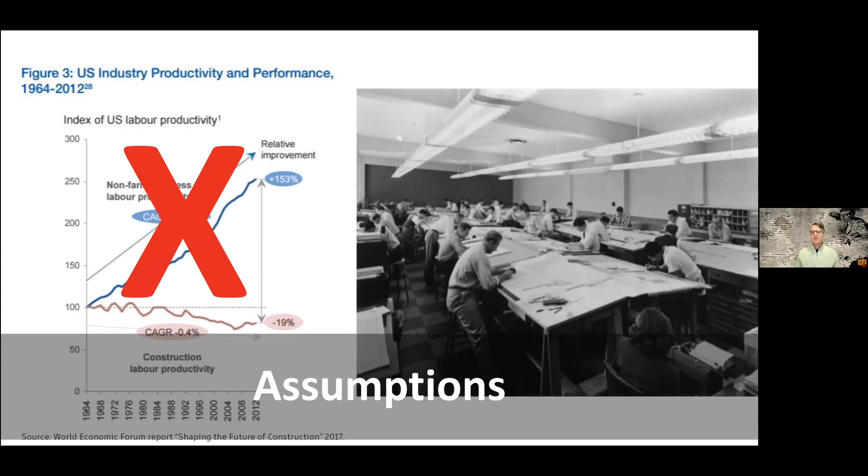I'm asking you to just quit worrying about that. Just don't worry about what happened in 1964. Worry about what happens tomorrow, 2020, and get off our collective you-know-what and go start fighting that fight. This assumption that we're an antiquated industry is ridiculous, and we don't need to believe that. We need to believe in what the future holds, and I think you'll hear a lot of that from the rest of the speakers today as well.

We're also fighting time. As of 2020, our industry collectively, at least in the US, is around 44, 45 years old. And if you look at our colleagues in the EPC world, engineering, procurement, and construction, that average age is more like 55 years old. I want you to think about that for a second.

In the AEC world and the EPC world, in 10 to 20 years, 1 to 2 decades, we lose most of the knowledge that we have today and how we design and build. To be really honest with you, that's both an opportunity and it should scare the heck out of you.

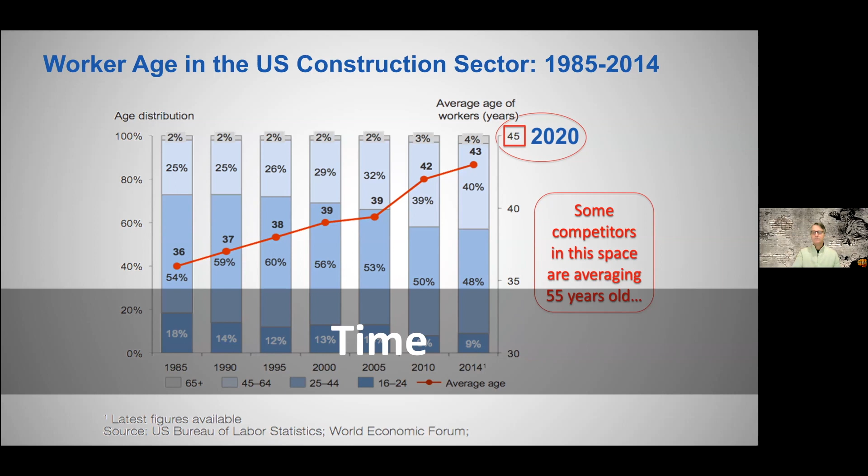Plus, we're fighting culture on a daily basis. At the very least, people are telling us to stay put, do not change. At the very worst, they're telling us to slow the hell down. And I'm begging you to fight through that. Put up your fists, put up your dukes, walk right through that. Don't listen to that. We need to speed up. We need to go faster.

And this is not about throwing more warm bodies at a project. It's not about trying to kill ourselves. I'm still talking about integrating, innovating, adoption of all these things that are in front of us, all these tools, all these procedures, all these processes. Adopt them faster, do better work, and do it quickly.

When I say new and different in my definition of innovation, what do I really mean? Is there anything really new or different? I'll talk about that in a minute, but every day is the future. You hear a ton on conferences and LinkedIn and a lot of talking heads, not unlike myself, who say look to the future, I'm a futurist, we're going to be on different worlds in 100 years and it's going to be great. I'm asking you to look just to tomorrow, just the next day, just a week ahead, a month ahead, a year ahead, because every day is the future, and I want you to take advantage of that. But having said that, let's for a second just look backwards.

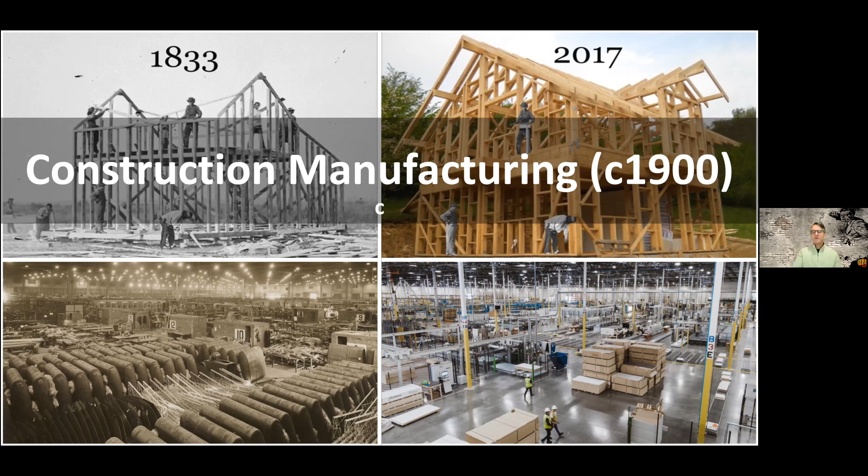Modular construction - I'm a huge fan of modular construction. I've created and spun out a couple of smaller modular construction startups. I am the poster child for let's go modular. What's crazy is we've had this since 1940, 1950. Amy and many others on this know this perfectly well. We're super excited about it in 2020, this is the latest and greatest innovation, but it's really not. We've had it for 50 years. Why in the hell have we not been doing this for the last 50 years and doing it excellently?

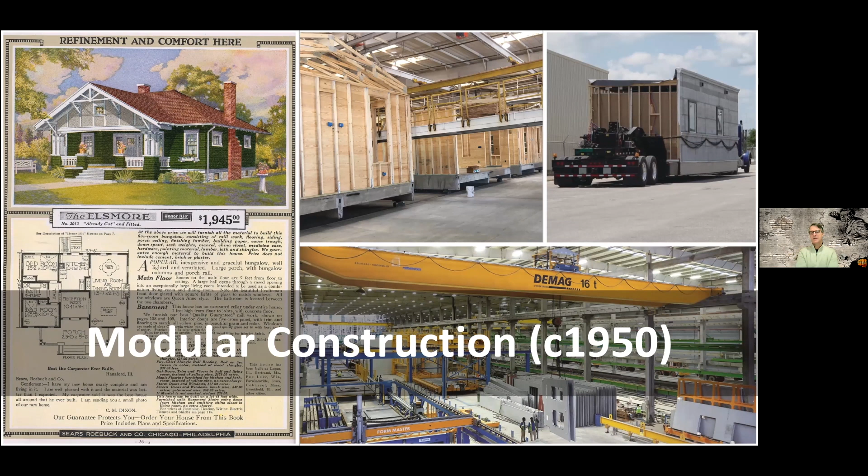In 2020, I'm telling you to fight through the assumptions that we've been making for many, many years and start adopting the innovations and the inventions that we have at hand and we've had for many years.

And I'm begging you to break through those barriers and tell everybody: look, we're not inventing anything right now, we're adopting. We're going forward, we're taking all of this great history that we've had and we're actually making it viable.

Industrial robots, in the manufacturing sense, aren't just for putting together a Volkswagen or a BMW. It's for putting together a building today, tomorrow, the next day. Since 1950, for 50 years we've had this.

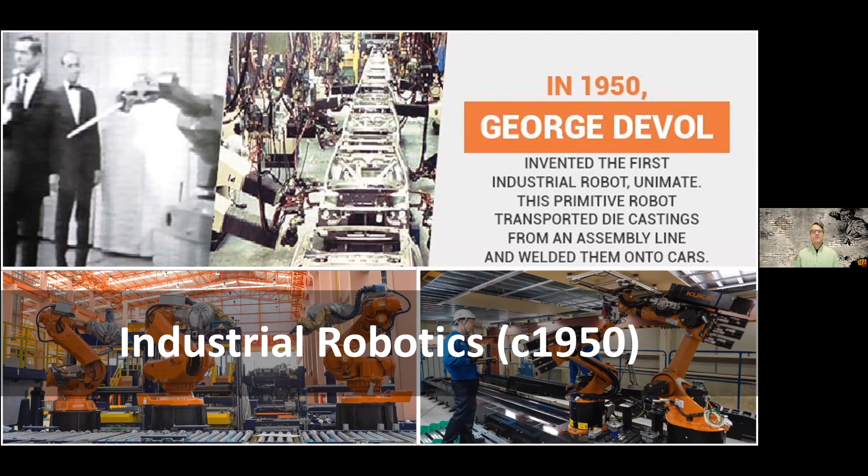And for some reason, we want to pretend that we're unlike everybody else and we can't use those innovative tools. By God, we can and we should, and we know how to do these things, and we should put those in our arsenal and innovate like crazy starting tomorrow. Even construction robotics - this is a huge field that is going to make a huge difference in the way we design, let alone the way we construct.

But this photo with Kennedy on the left-hand side is not a photoshopped photo. He's strolling past viable construction robots in the 60s, and here we are today, getting super excited about something that has been around for 40, 50 years. But for some reason, we've been fearful of pulling it onto our industry platform, pulling it onto our job site, pulling it into our designs.

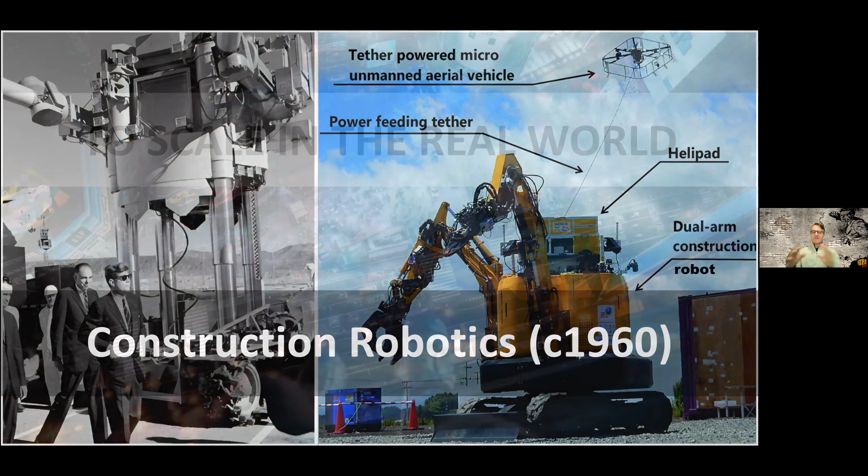And I'm telling you, there's nothing to fear here. This is all good. This is all innovation. This is all opportunity. Having said all of that, how do we scale all of this into our world now? It's not that we haven't had it. We've had it, and we've got it today. Now, how do we scale it into the world that we go through?

Well, sort of like I've been talking about, this innovation continuum that we've been on since the dawn of time - everything that we have today that we think is required, the cell phones, the cars, the PPE, the processes, the procedures, all of those things, whether it was a document or an artifact, was impossible at some point. Some crazy person jumped out there and did something, some kind of prototype, some kind of silly thing, and it looked impractical, and we laughed at them and we pointed at them, frankly.

But then a spark of genius showed up in each of us, and we thought, well, maybe it's possible. And then we said, wait, it's not only possible, I want it. We should have that. That's genius, right? And then it became scaled and required.

And I'm asking you to jump into that. Everything should be expected. We should expect everything, to be honest with you. We should go after everything. We should have everything because we can. We're smart enough. We can do this thing. We can innovate the heck out of our industry and expect everything that you want can happen, can come to fruition, and it can be required.

Scaling this innovation is really important, and I'll give you the one secret word to scale across every industry, let alone ours: experiment. And this is the one thing that I think our industry is really, really loath to adopt. And it's the one thing that has held us back for 50 to 100 years. And that's experiment. We're so worried that we're going to spend money on things that don't work. And we're so worried about failing fast or frankly failing at all.

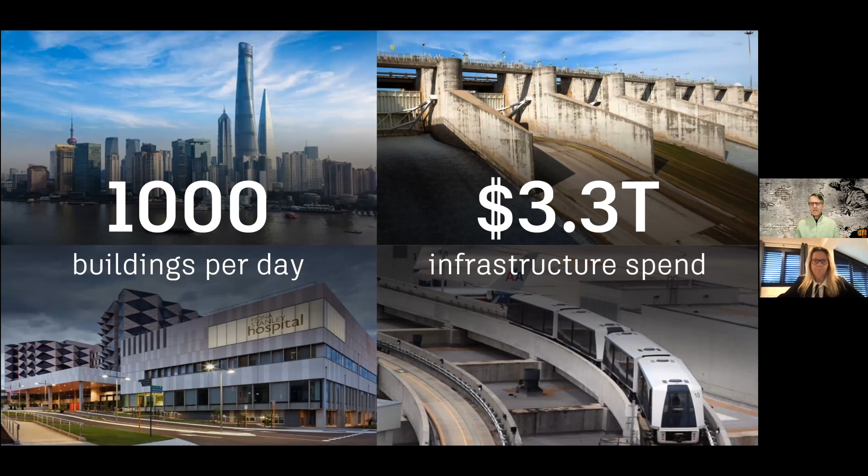We collectively are building buildings at 1,000 per day, and that number will only go up. The spend on what we do is only going to go up. Trillions and trillions of dollars in infrastructure. We're 6% of the global GDP demand. And then you've got regional demands and requirements, and Ireland is in this as well, just as the United States is, and EMEA and APAC.

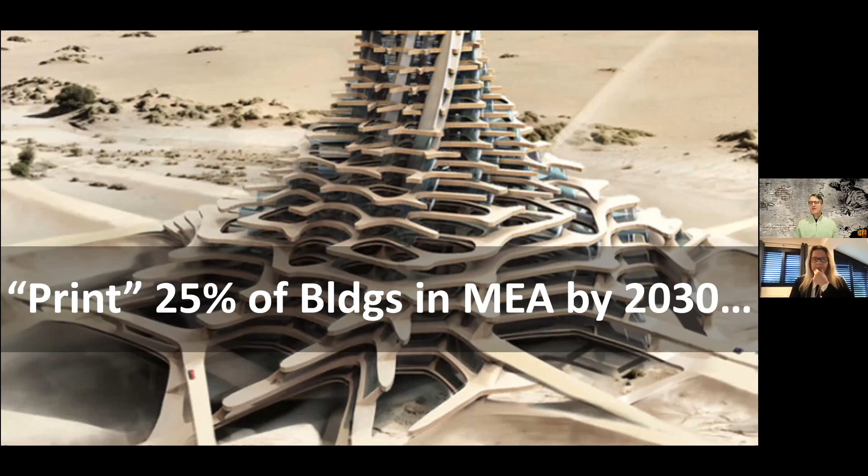But you look at MEA, and they're talking about printing 25% of the buildings across their region by 2030, and that's nothing. Our own U.S. government, whether you love them or hate them, has basically put a flag not in the sand on planet Earth, but in the sand on Mars. We're talking about inhabiting Mars by 2030.

And even if you think that's silly, even if you don't believe that's going to happen, putting a flag that far out and failing gloriously is going to put us and our industry so far ahead of where we are today that it's going to have a huge significant impact. So my call to arms here is get in the ring and innovate everything, question everything. Look at what you're doing and try to make it not just a little bit better, but in a crazy, crazy, crazy amount better.

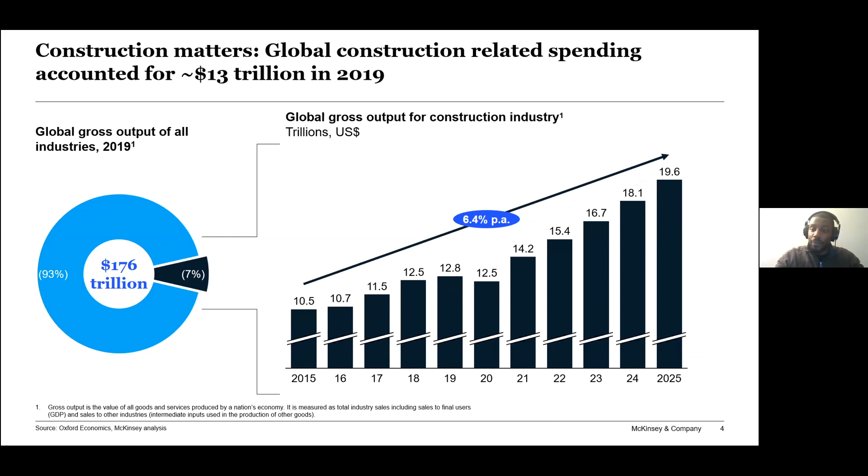I won't belabor this point because Chris talked about it pretty eloquently during his talk, but there are some significant outcomes and dynamics that drag us down as an industry. When we think about the construction industry overall, it's a really fragmented industry. We're talking globally here, everyone works on a project-based approach. There are generally misaligned contractual structures and incentives, and a lot of use of temporary contractors and staff.

I think this is a contributor to some of this risk aversion in the industry: a big general contractor is in many instances not necessarily executing, hands on hammers, a project, but they're managing the project and managing the risk around it. So you've gone from people investing in truly building the asset, outside of the technical and project management expertise, to people managing the risk around the building of the project. And when you're a risk manager, you're naturally much more conservative than if your entire business doesn't hinge upon your ability to manage out risk.

So where does that get us? Lagging productivity growth, we've talked about that previously. Slow innovation and digitization. Low profits - I know Chris quoted a number around 1.8% on average globally; we're looking at 4 or 5%, so that's not as bad as 1.8, but still nothing to write home about. And then low customer satisfaction overall - budgets and schedules are routinely overrun.

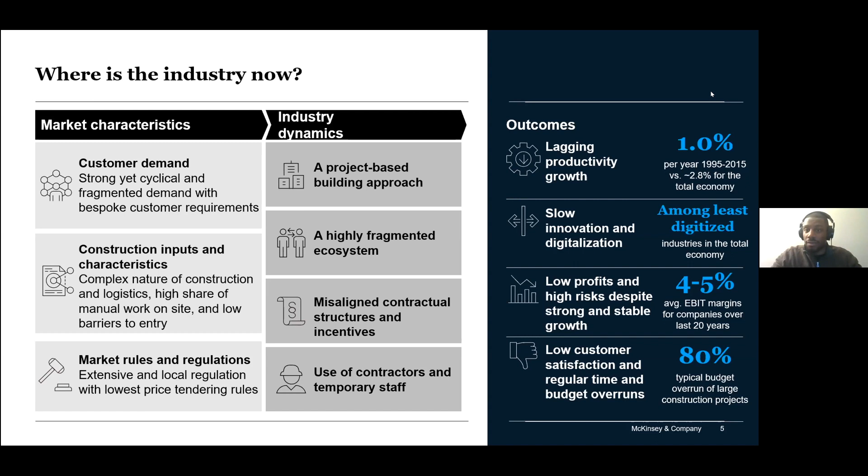So what does that mean in the context of COVID-19? We did a survey back in May to understand what the industry was doing related to the global pandemic. Nearly 70% of respondents believed that COVID-19 is going to accelerate investment in technologies and facilities. And that was mirrored by this thought that they were going to also invest in the control and value chain and industrial grade supply chains.

So what do we mean by industrial grade supply chains? Right now, if you're a general contractor working in construction, chances are you work on a project by project basis. You sign a deal with an owner, and 6 to 12 months later you're calling your suppliers for the materials for that project. You're either putting those materials in a laydown yard, or storing your consumables at an offsite warehouse. You've phased the really big stuff in so that it gets built and shipped to site on time. And then you build that project.

When we say industrial grade supply chains, we're talking more about Volkswagen, Ford, even Tesla, Microsoft, Dell, Intel - supply chains that span multiple projects, that span multiple geographies, and that leverage the heft and breadth of your organization across multiple projects to drive up your efficiencies and drive down your overall material and supply chain costs. This value chain control and integration with industrial grade supply chains is one of the main pushes that we see, and it's also accelerated due to the global pandemic we're currently in.

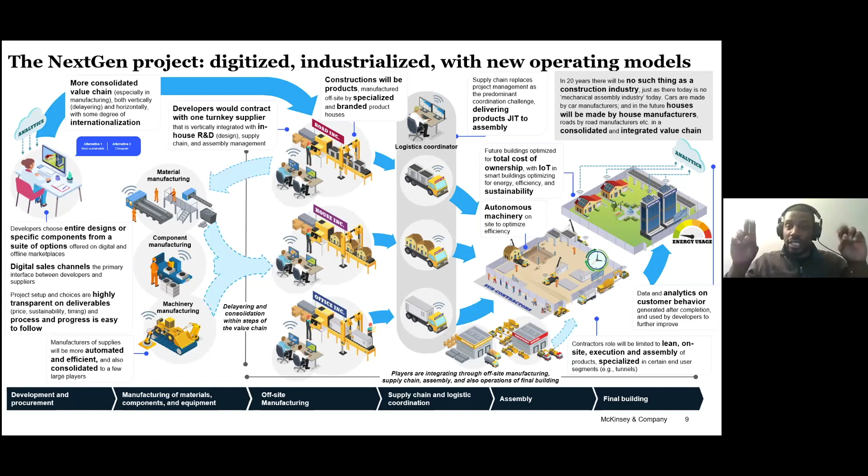Finally, when you look at contracting and execution, the contractors and folks on site are going to need to produce a project at a much higher level of productivity, with what you'd consider the buzzword lean construction—execution and assembly specialized and focused on site at a much higher degree than we are right now. So let's look at a couple of case studies about how this is actually happening right now.

We made the statement that developers are choosing entire designs or specific components from digital marketplaces. In a sense that's happening right now. I picked a random manufacturer on the platform, so there's no focus here specifically on CEMEX—there are lots of different building material suppliers here. But NBS Chorus and NBS Source effectively enable you, through BIM objects, to choose and specify the specific building material and supplier, in some cases way back in the design and specification phase of a project.

So you have architects literally saying, I want CEMEX dry silo mortar in the masonry that's going to go in this area of my project right now. There are also, through NBS Source—again just an example—ways to enable them to say, all right, I'm now going to go to that manufacturer or building material supplier and source the materials earlier. So you're seeing a couple of things.

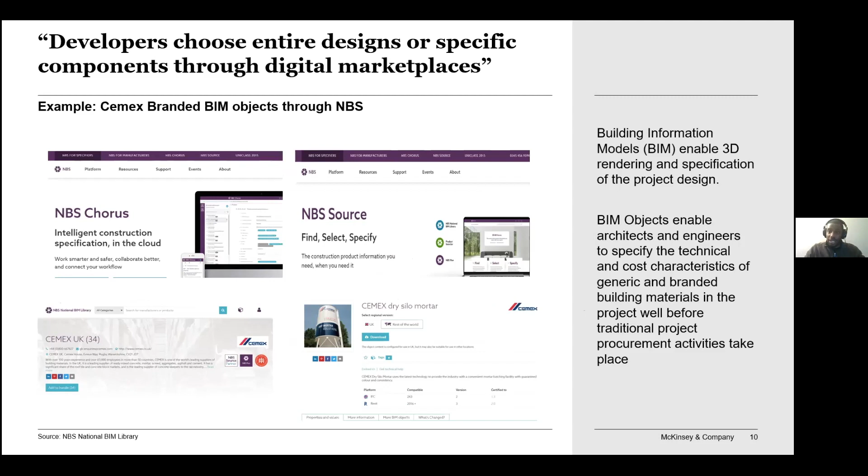You're seeing developers shift this procurement function earlier in the process by leveraging building information models and BIM objects. And you're also seeing the rise of these digital marketplaces, as opposed to needing to go through either a general contractor or even a distributor. You're able to specify these things and then access them digitally.

Developers will contract with one turnkey supplier. The market's global poster child for this is Katerra, but there are other players, most notably in the UK, Top Hat, also following this model, where they own the production of the building end to end, all the way from architecture, design, and engineering through execution. While these are newer models, they won't be the last to adopt it—now you're building a Katerra real estate or multifamily asset, or a Top Hat single family home: a branded project, as opposed to Joe's Construction building a bespoke house somewhere.

Supply chain replaces project management as the primary coordination challenge. This is an example from 2019 in England, where Mace Group built factories on top of two high-rises in Stratford, literally managing the supply chain to bring building materials onto the factories, subassembling all the components, and then fitting out each story. They completed 18 stories in 18 weeks without raising the cost of execution.

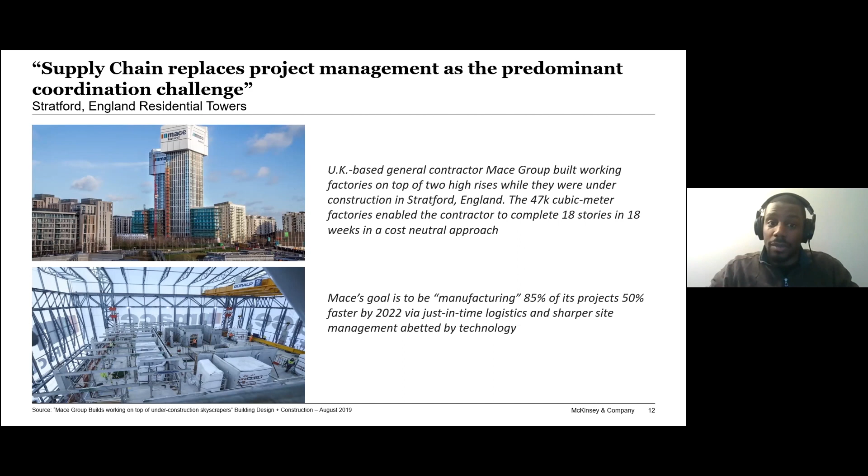Talking about moonshots, their goal is to be manufacturing—not constructing, but manufacturing—85% of their projects 50% faster within 2 years from now, via just-in-time logistics and sharper site management abetted by technology. So it's not simply about project management: are my subs on time, do I have materials in my laydown yard. It's about managing the logistics and supply chain as the fulcrum of your productivity and profitability, rather than just your ability to manage risk.

So those are the topics I have to cover right now. I see Claire with my warning, so I'll stop here. If there were any questions and I had time, I'll take them, if not we can move forward.

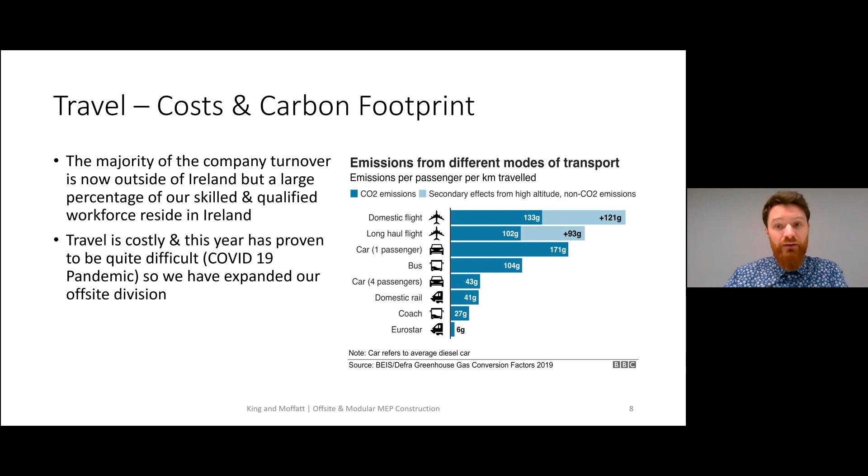Another reason we started looking at this is delivery issues. We find that doing some of the work offsite really eliminates issues we've been having with deliveries of material to site. Deliveries from wholesalers usually never arrive when they're promised.

You could have a team on site go up and install brackets, and then the cable ladder might arrive a couple of days later, and then the basket for your ELV stuff mightn't be there, so that might arrive a couple of days later. So what's happening is people are returning to the same location on a construction site on numerous occasions to try and finish one task.

That image on the right-hand side, we'll talk about it later, but basically everything is arriving all at the same time - all the supports, the hangers, end caps, 4 and sometimes 5 different types of containment. So when that stuff is brought up on the MEWPs and cherry pickers and fixed onto the structure, it only has to be visited once. Everything has been put up in one go, so there's no going back there again.

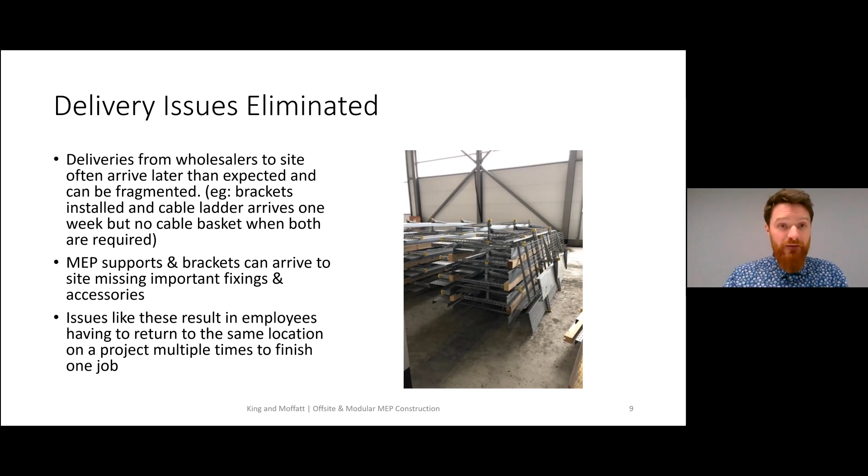Another reason we were looking at it is a lot of the projects we're working on suit modular and offsite methods of construction - large-scale logistics centers, warehouses and food processing facilities. There can be long linear M&E service runs with minimal change over the course of a full run. That image on the right, that particular building is 0.5 kilometre long. So if you can come up with a method of repeating a certain run of services and building them offsite, you're on to a winner.

Again, modular lighting systems, cable containment systems and pipe systems are very suitable for this.

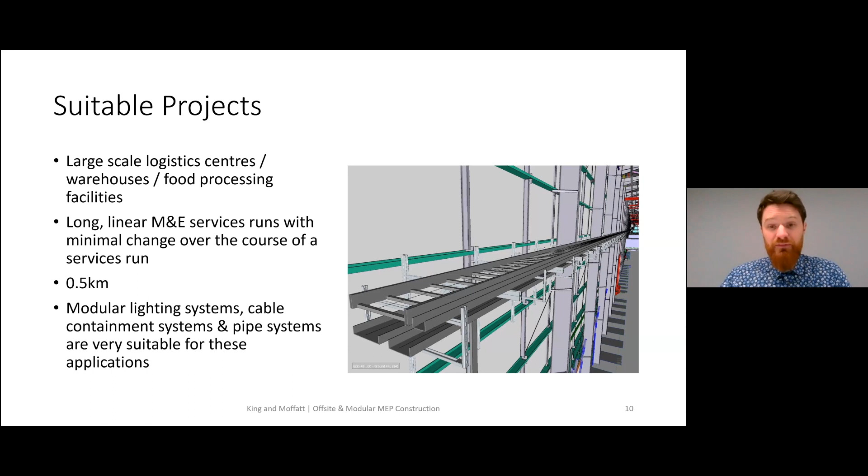We've noticed an increase in safety because you're undertaking all the work in a controlled environment, eliminating things like weather-related dangers that can be associated with a construction site. If buildings aren't sealed, you have wind or frost or maybe other trip hazards, and then falling from height accidents - you're taking all of those out of the mix.

There's less competing with other trades for workspace when an area becomes available. What I mean is sometimes when you're a subcontractor on site, like mechanical and electrical, you might have sprinkler or refrigeration trades, people putting in drywall and trying to get drop rods in, but you could be waiting for a concrete slab to be poured. What's happening then is everybody's racing into the same corner of a facility trying to get their services in, so it's increasing danger and it's less productive.

The most suitable tools for the tasks are permanently installed in a fixed location in an off-site facility, with all the PPE beside them. You have dedicated workstations for assembly and cutting. So rather than cutting supports with a battery-powered angle grinder, you have dedicated saws that can cut through full bales of unistrut, maybe 50 lengths in less than a minute. Again, it's saving time and it's safer work.

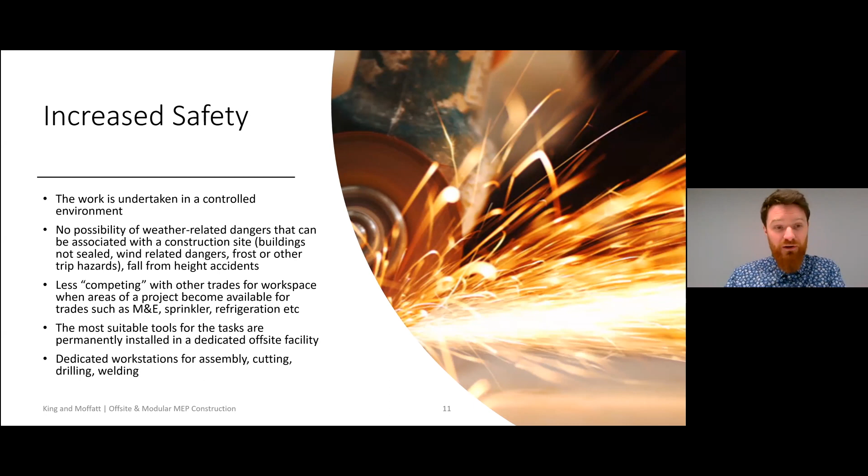Project programs and handover dates - these programs and the dates we have to hand over buildings, it's getting tighter and tighter every year. We're getting into the jobs later, but the handover dates aren't changing. So sometimes we'd have weeks to get in and do a full install for a client with the main contractor and have to hand everything over.

Having the prefabricated M&E service modules ready for dispatch reduces the installation time on site, and we can be building those while things like the structure is going up, the concrete is being poured, the building is getting sealed. As soon as the team on site are ready, we can have them on site within a day or two - if the job's in Ireland, it's within a day; if it's in the UK or Germany, within 2 days. Instead of starting everything from scratch on site, you're really speeding up the time on site. All the M&E modules are pre-assembled, so they just need to be lifted into position and connected to the structural elements, really reducing the amount of time we have to keep people on site.

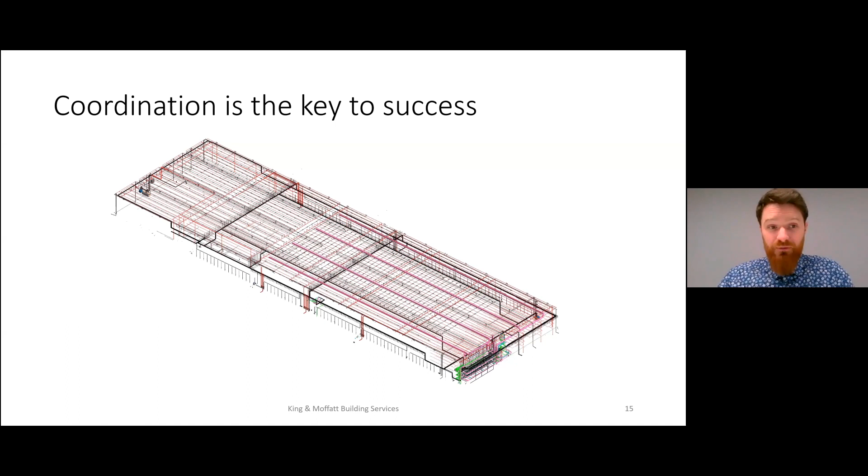For a new build, the coordination with other stakeholders is key, and we use BIM to coordinate with other stakeholders on a project. We really try to have fully clash-free models before we start any work on site, or before we commit to building MEP modules off-site, because it's a huge risk for any company if you get to site and realise this contractor hasn't delivered in BIM, but because of regulations in this country, they can't move - they have to be in that position. You'll have to move this duct, or these pipes, or this cable containment. That's why having a coordinated first-off is key for us.

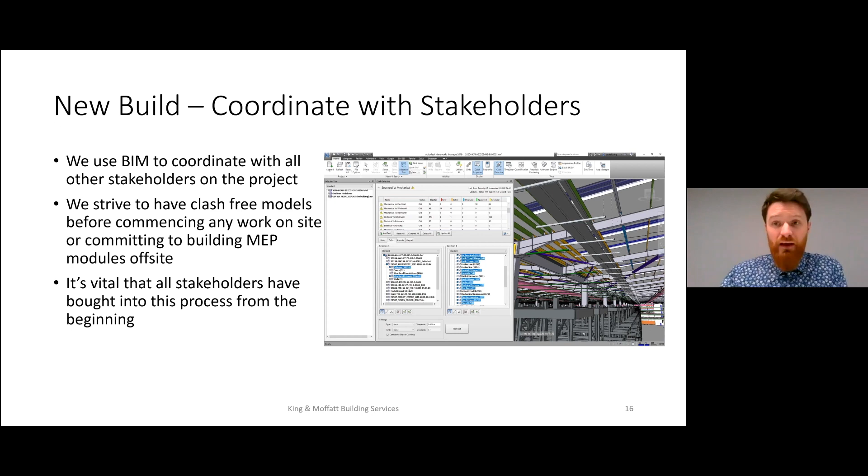I think it's vital that everybody has bought into this whole process from the beginning of the project. For any existing buildings, we go in and laser scan them. I have a very short video here that shows a bit of the process - after doing this, you have an exact representation of what's on site, so it allows you to move forward with confidence.

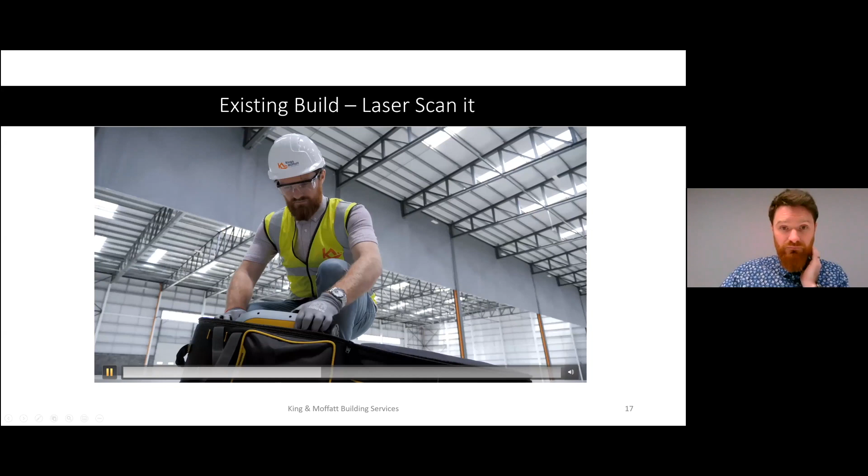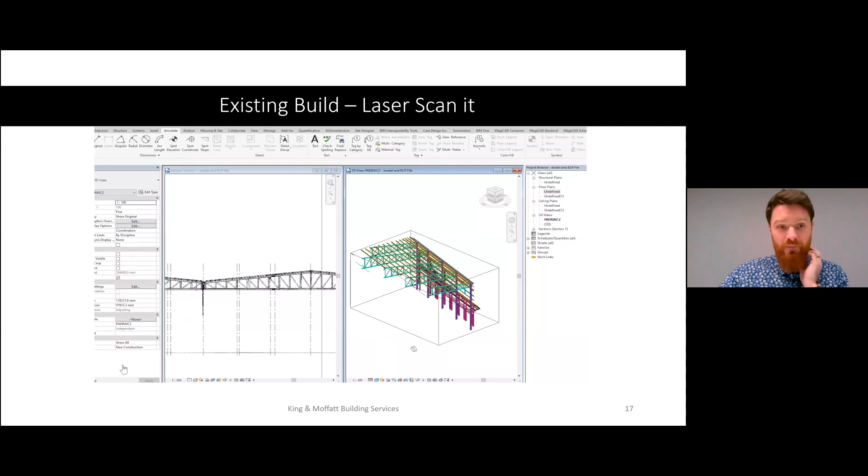That video was if we were going into an existing project that's not a BIM project and there's no 3D models available, but we still want to try and do as much as we can off-site. We go in to get a real picture of what it is, we laser scan it, and that gives us a point cloud. We build a model of the point cloud, and then we're able to coordinate all our services, supports, and our main routes and spines of services within the building, and we know when we arrive on site that it's all going to work.

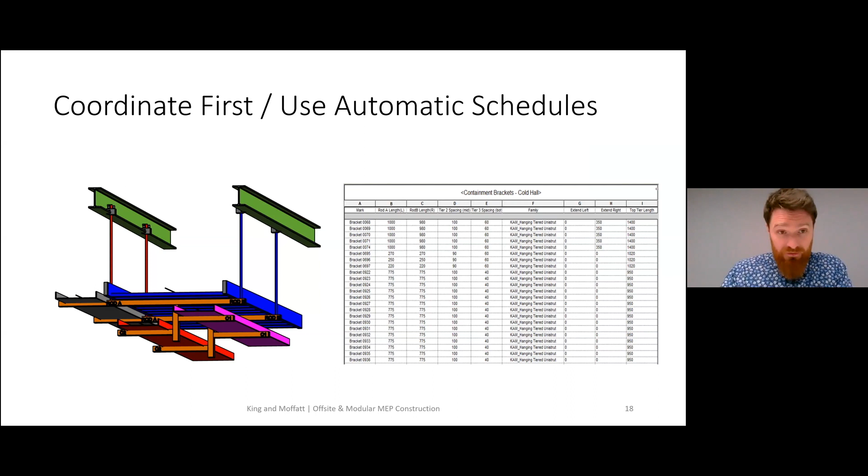We also use BIM to take out all of the information, so there's no manual takeoffs or manual counting. After we've built all the brackets, we're able to take everything out of a schedule straight out of Revit on the right-hand side, and that can go straight over to offsite. We've actually developed this further in the last couple of months, and we'll show that on a slide later on. When we do this process, we can get all of our stuff to site in time, and it's right first time.

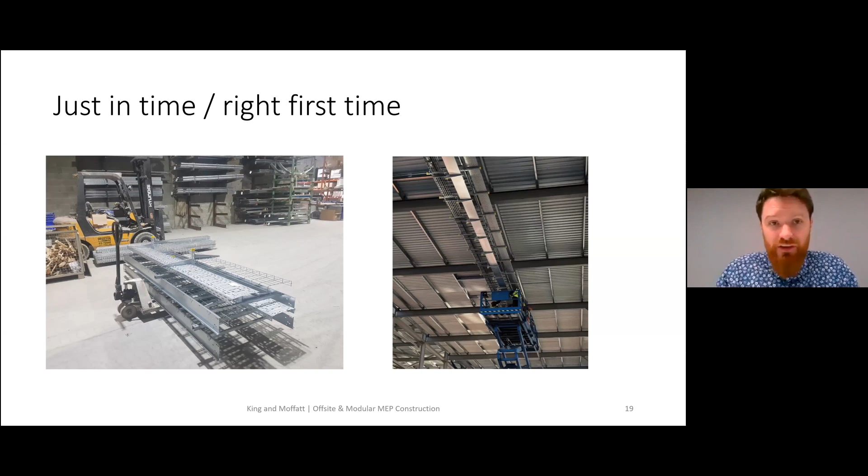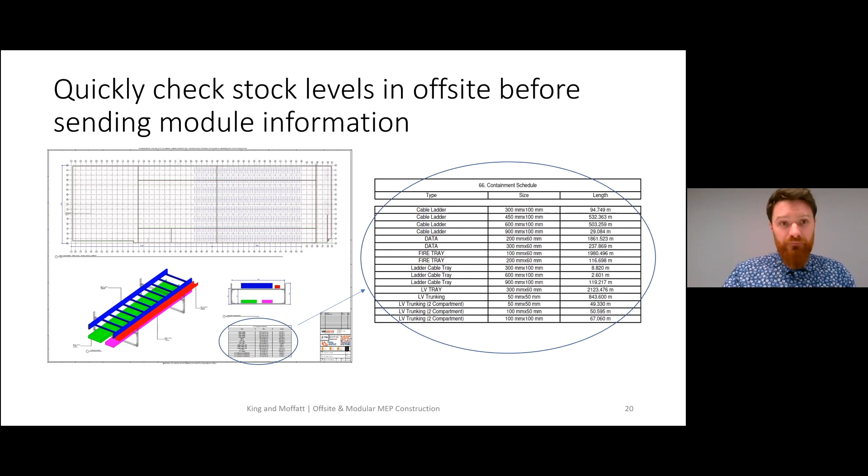A big focus is on combining the M&E services and the modules that we send out to site, because we send a team out, and if brackets or modules are put up, it's pointless to have another team go out and do the exact same thing for the mechanical element if someone's already gone up and done it for the electrical element. So sharing bracketry, doing all the load calculations on the structure, and getting them approved before you install them on site is very important. By doing that, you're saving time and money, and eliminating the double jobbing associated with it.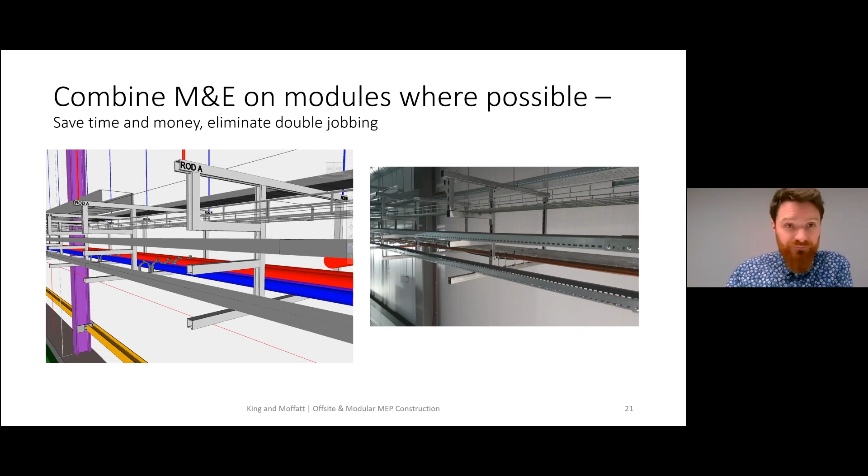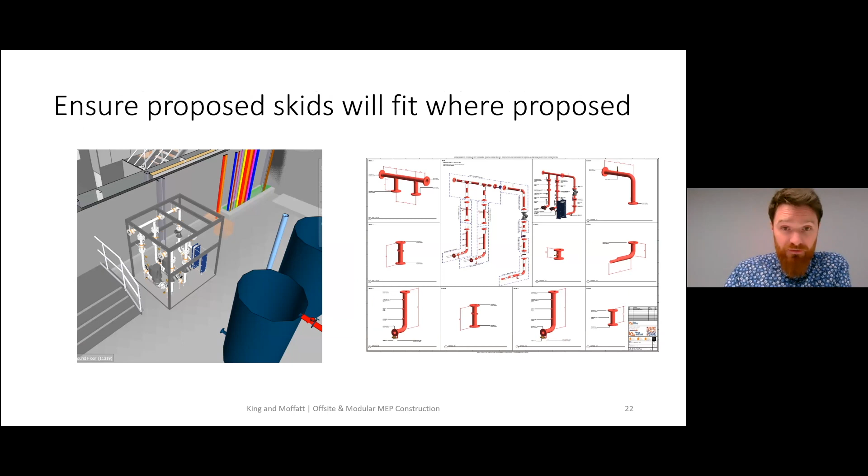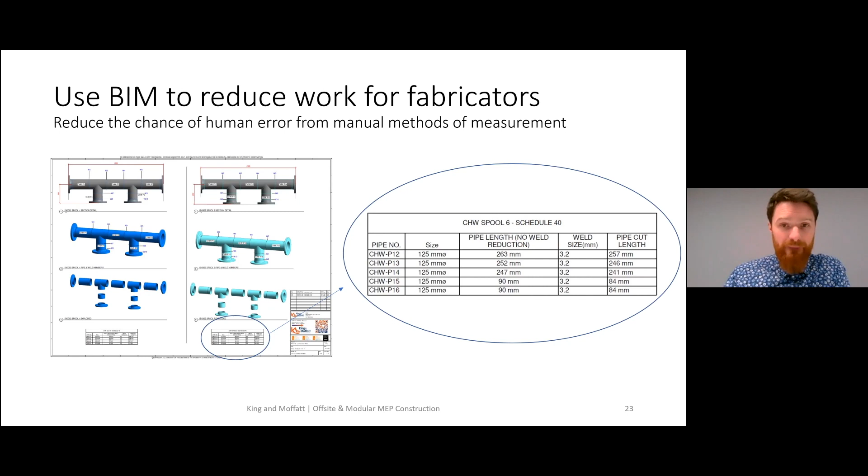For designing skids, the first thing we do is check that they'll fit where we're proposing to fit them. We're using BIM to develop up all our skid designs, and that means our fabricators don't have to go around manually measuring or doing any takeoffs. All of their pipe cuts are contained on a drawing that we send over to them. So again, it's just reducing the chance of human error and saving time when everything is sent to offsite. There's no manual takeoffs or measurements needed if you use BIM, and you can do everything with confidence. That's what I feel when you have that reassurance.

Again, for any kind of linear modular systems we're doing, if you're going to the effort of building it up in your Revit model, use the power of BIM to give you that automatic information back out in a schedule. That's an important step.

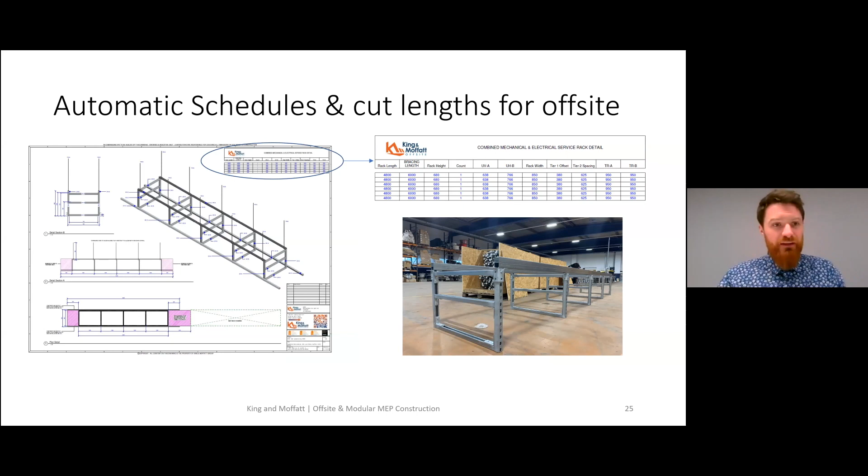This is something on site that takes a lot of time. It's hard to get it looking right, and a lot of the time the containment surrounding those distribution boards — the wrong 90-degree bends — can arrive to site, and they're a specialist type. So again, standardizing this eliminates all the time and labor you could lose on site.

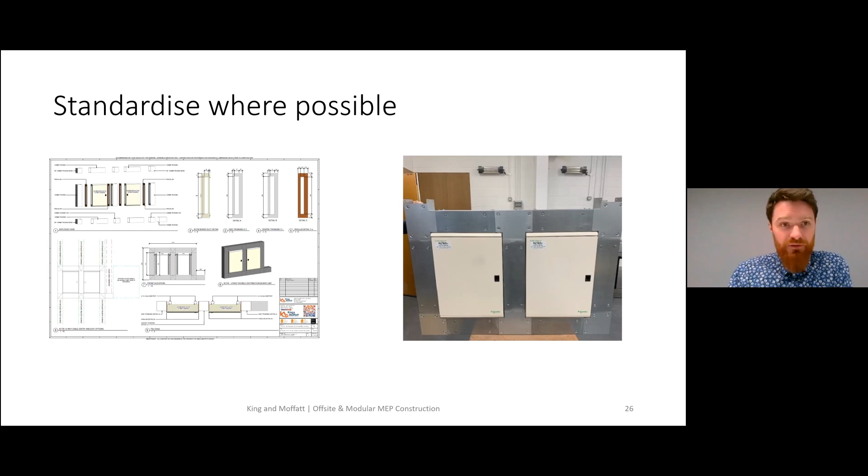So again, standardizing and automation. There's probably a lot of people going to be talking about it today. I'd love if we could do more of it, but I still believe with the different specs, regulations, clients and main contractors, it's quite difficult at the moment.

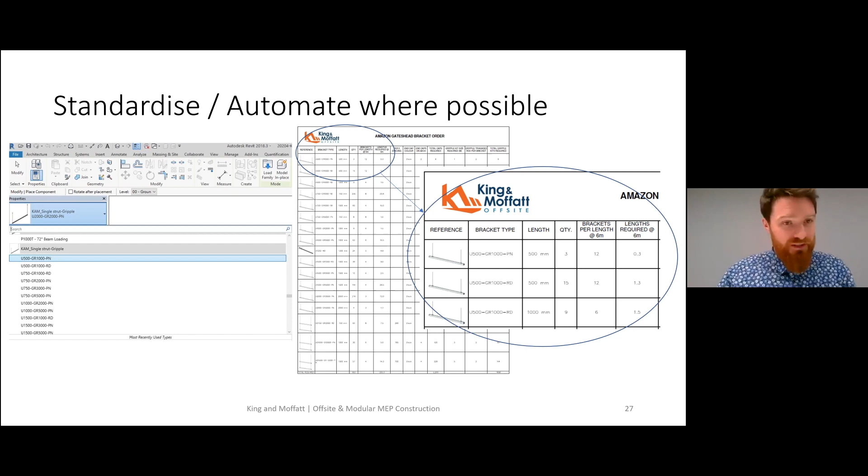If you're getting into offsite, try and look at solutions that are easier to ship and transport. You have wire suspension systems instead of threaded rods. They're way easier to transport, they take up a lot less space, and you're eliminating hotworks on site. If they need to move up and down on a hanger, you don't need to cut them with angle grinders.

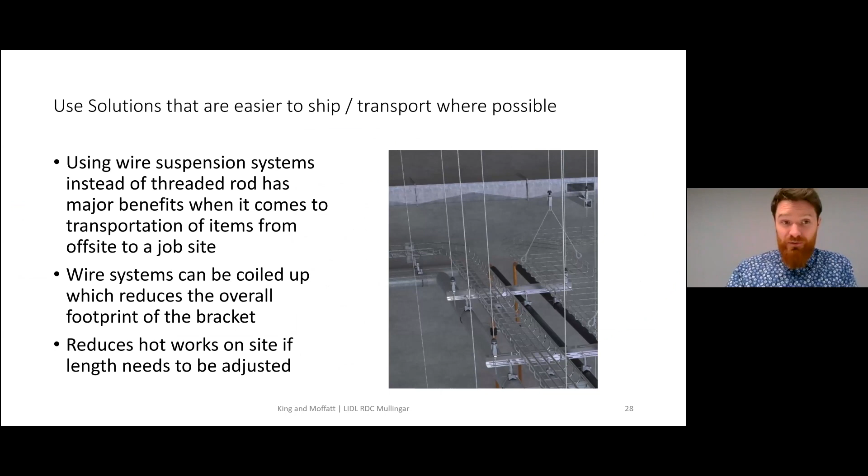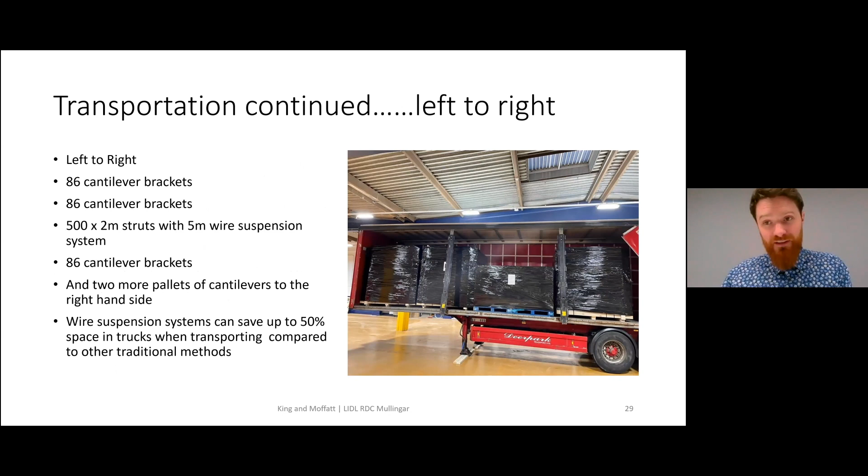Modular lighting systems, again, you just hang them up and plug in your lights. Each one doesn't have to be wired separately. You can take the light fitting off them without plunging a full circuit into darkness. There's greater flexibility if a client wants to move them in future. They're not fixed. And just a couple of the benefits very quickly, and that's me finished, everybody.

Huge savings on travel costs and wasted time associated with travel, reducing the carbon footprint. Safety benefits like the controlled environment, suitable cutting, drilling and grinding setups, workstations and tools there full time. It's helping us with programs on site. We've way better control now of when everything is arriving to site, and there's less time required to install it on site. It's eliminating a lot of paperwork associated with RAMs and hotworks permits.

Saving on labour costs, so the site team aren't standing around waiting to get access into an area of a project. Saving on material costs, because it's exact ordering of materials, and we're buying in bulk into one location now as well, and there's a saving associated with that. It's made a lot of elements of our workflow much more lean.

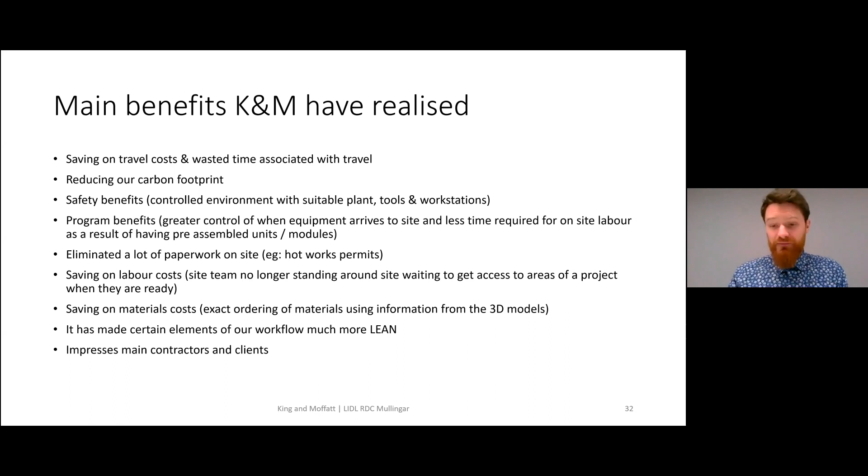Main contractors and clients love to see it, and we're just going to continue to push this aspect of the business over the next 12 months.

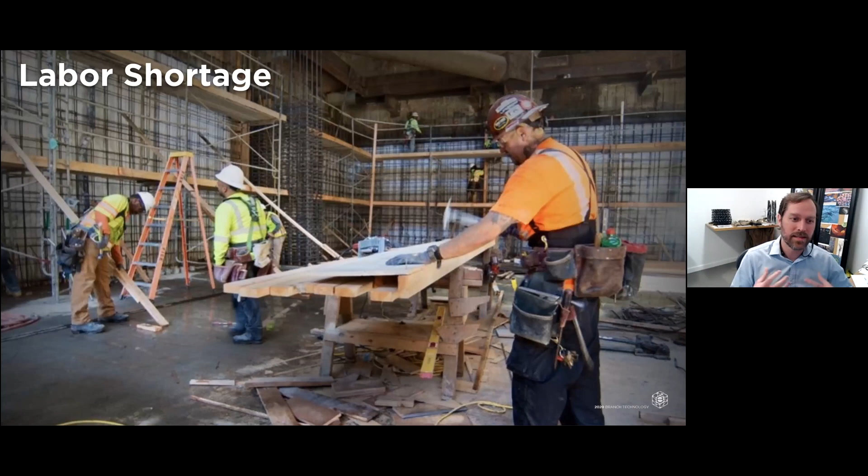Talking to most general contractors and subcontractors, asking them what their #1 problem would be, most of them would say finding qualified people. So they can't really find the qualified people, and the ones that are out there, they have to incentivize through higher pay. So we have this rising labor cost, and we're overspending on that labor.

So second question, what if you could galvanize a new workforce and bring in some of these millennials or Gen Zs?

The way that we make things is we take a huge chunk of earth from one place to another. We harvest it, we move it, refine it, process it, productize it, then we warehouse it, ship it to a site, and then for that bespoke building, we take that component that's a given size, we cut and carve out of it for that custom building, and then we throw the remainder in another big pile. So what waste? So next question, what if you could only use the material necessary to build custom buildings?

And then last question, what we've seen in the computer and the ability to create for the last 20 years is almost impossible with traditional methods of construction. It's this digital divide. So what if you could make that impossibility a possibility?

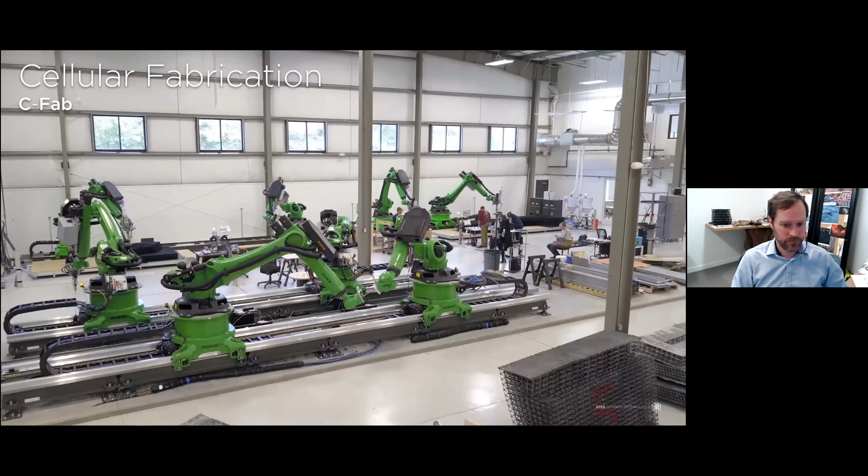So our approach is a bit different. We use large-scale 3D printing, but instead of a layer-by-layer approach, we use a unit geometry of a cell. It's a process called cellular fabrication.

Hopefully this video will play smoothly. Our software creates the internal geometry and sequences a custom path plan for a large-scale industrial robot. We're using freeform 3D printing that we've developed, where material solidifies in open space.

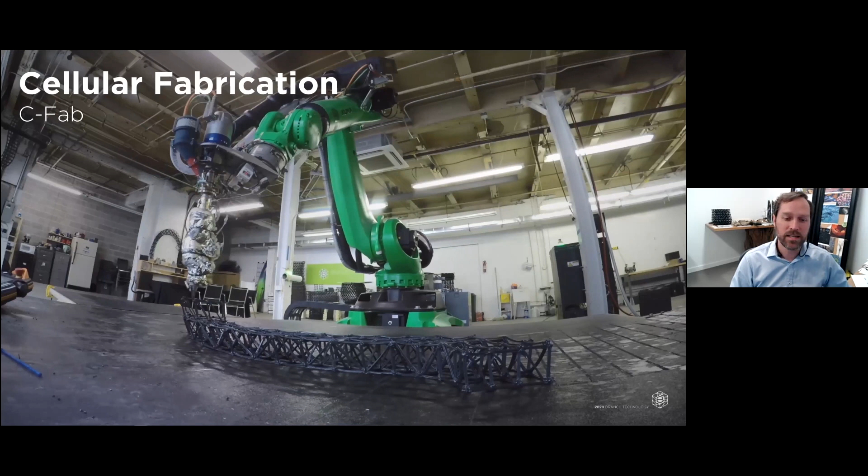And what you're seeing is using 20 times less material than a solid print process. In this case, it's carbon fiber reinforced polymer, where a 2-pound block can support 3,000 pounds.

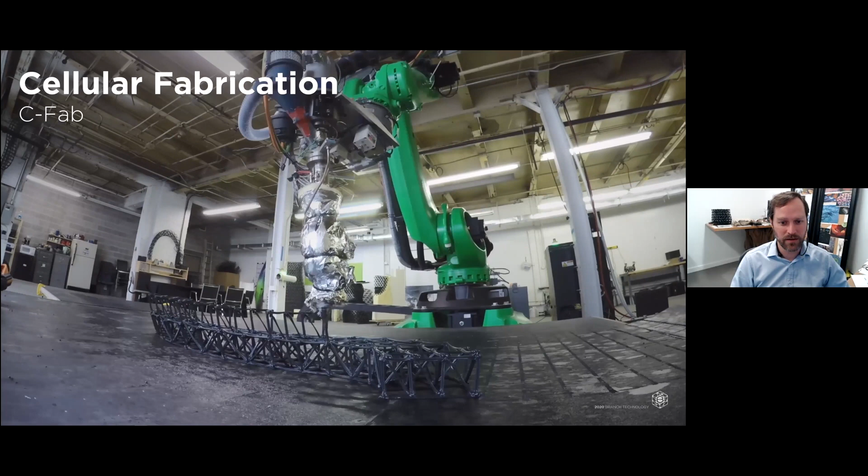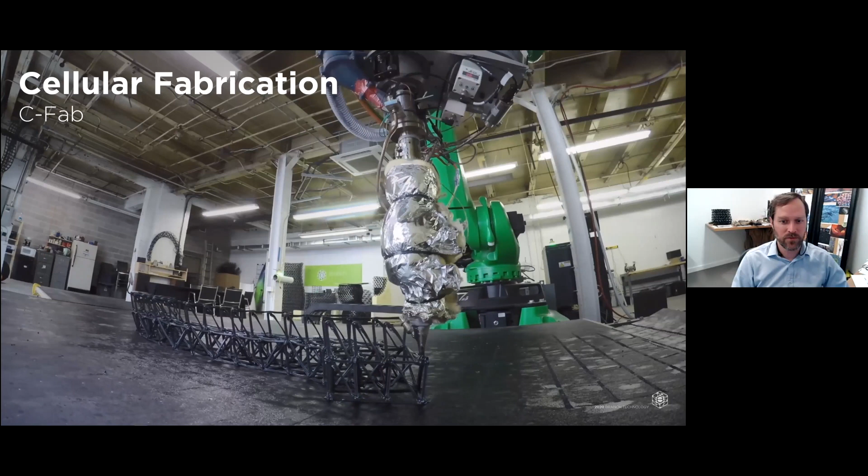We take that kind of skeletal structure and fill it with fire-rated commercial grade spray foam, and then we mill that down robotically to get to the custom surface finish. Now instead of 3,000 pounds, that same block can support 6,000 to 10,000 pounds depending on the density of those cells. That's about 3 to 4 times the strength of normal wall framing methods.

So this is direct digital manufacturing. We start with that 3D model, and then it flows through our software stack. What we digitally produce and sell are those custom components that can take on almost any shape.

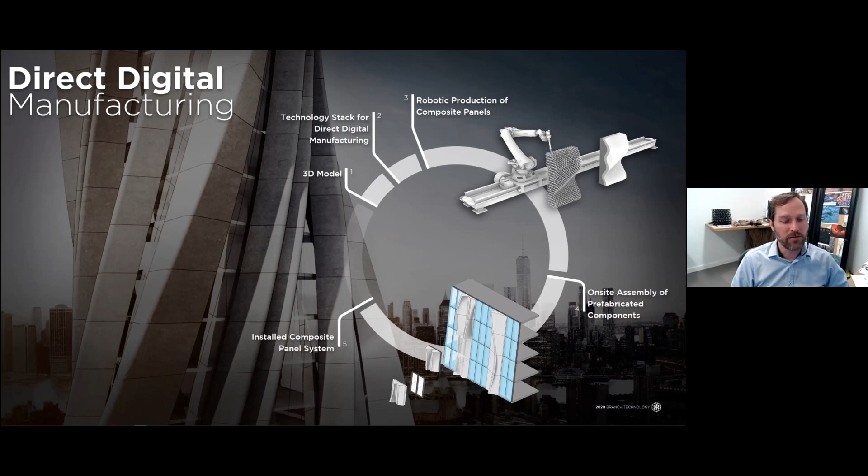Those are then shipped to the job site and fit together like big Legos on site. So what we're making right now are these prefabricated next generation wall systems.

It's a custom facade for a commercial building, and it's creating that signature identity. It attaches back to the structure of the building and becomes the outer skin. So these panels, they're lightweight, they're strong, they're fast to install, and they have 10 times the design freedom of traditional methods.

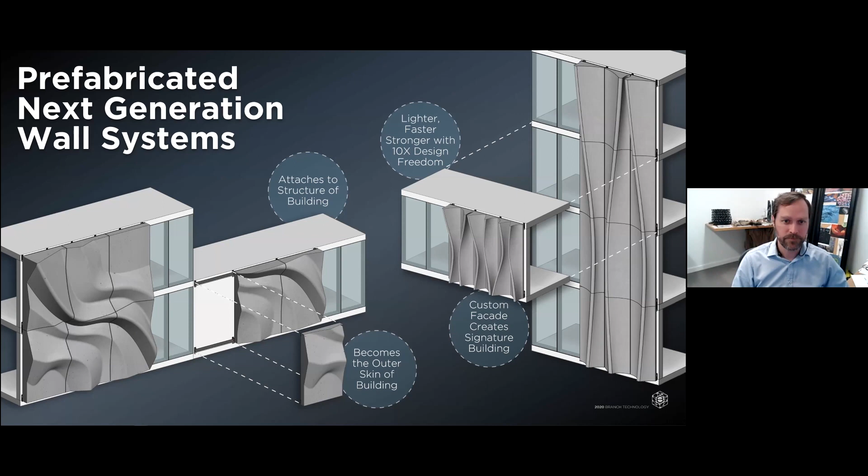So you can see here some of the finishes. We're calling it BRANCHClad. The one finish on the left is glass fiber reinforced concrete. And then this on the right is a lightweight synthetic stucco.

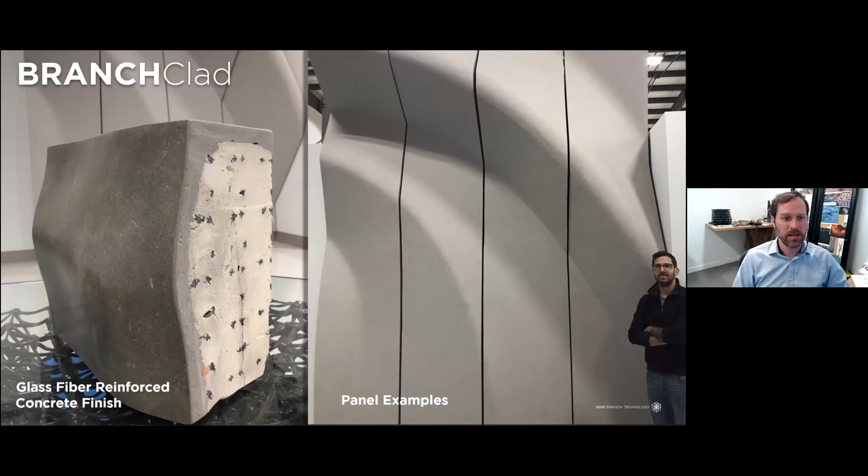So technically it's a ventilated rain screen that is outboard of the weather barrier of the building, and it's hanging on just the traditional carrier system for rain screen. So those panels hang on that carrier system.

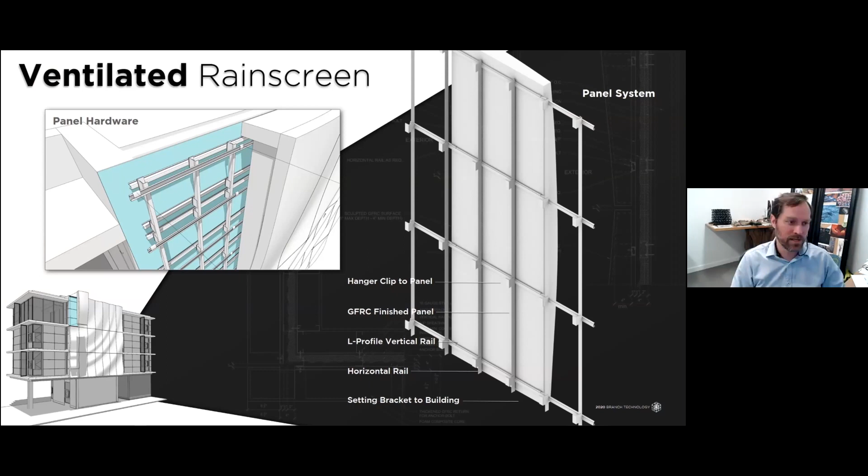So what this is doing is taking something that would be like a very, very boring kind of office park. This was an example project that somebody asked us to take a look at. It was a really boring 80s office park, and we showed what could be done by applying different patterns to that skin. And what this is really doing is creating signature identity. Especially in COVID, where we all have to set ourselves apart in some way to survive, this gives that ability to distinguish from just all the boring boxes.

So a couple examples. This one is installing now. We're based in Chattanooga, Tennessee, in the southeast of the US. So this is here in Chattanooga. It's a bank, and our design team created several different schemes showing some of the digital possibilities. The client selected this one because it emulated their logo and kind of waved across the facade. This has now been prefabricated and it's going on site now.

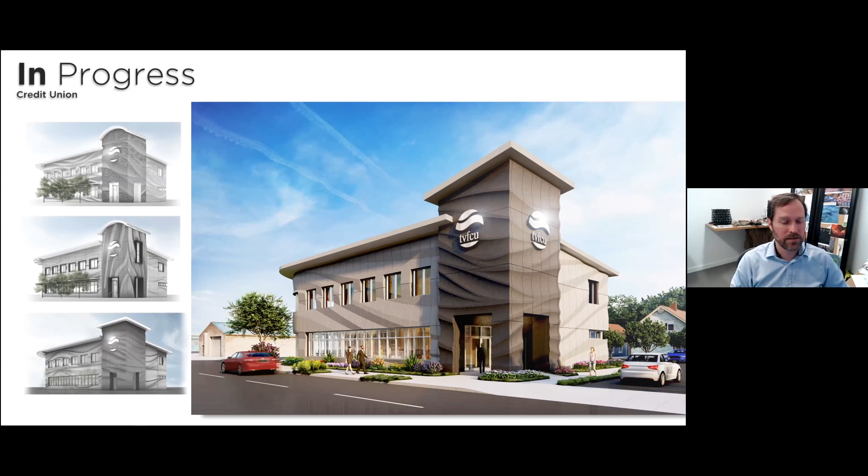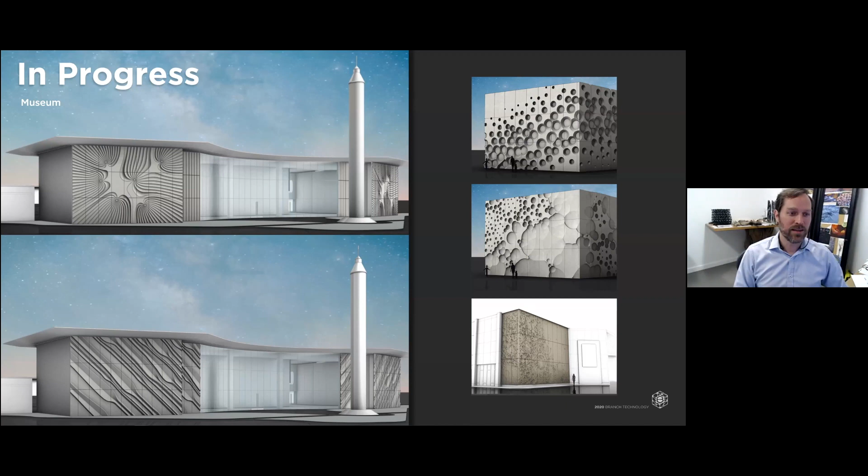And then another project, this is for a museum that's space related, using different themes having to do with rocketry or places that you might go. What we did is we took a scan of the moon and literally put that onto the facade of the building. So when people come up to this building, they'll see the texture of the moon on the surface of that facade.

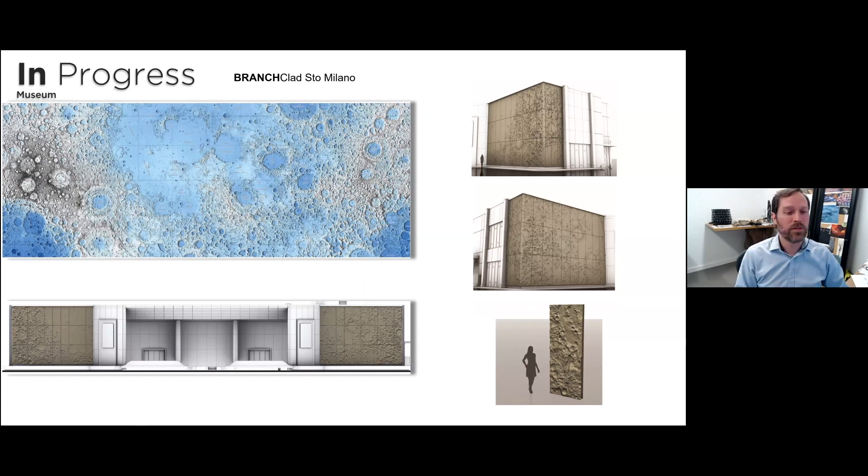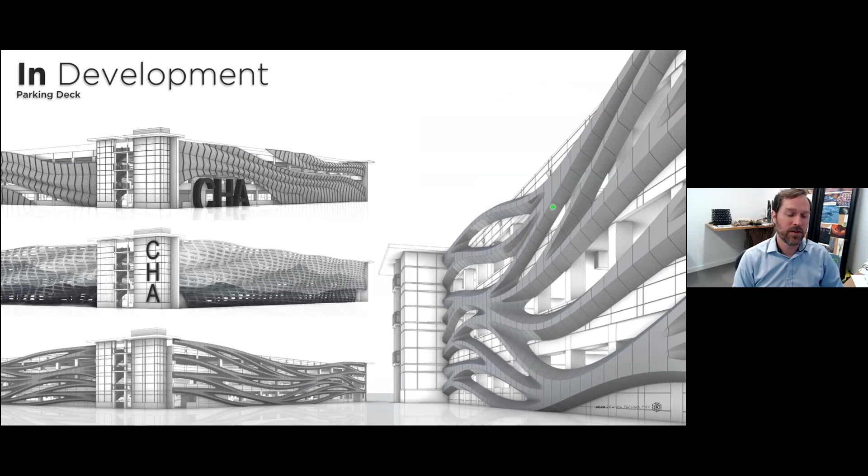Then, working with a design build team going after an RFP, we created 3 different schemes for a parking deck local here to Chattanooga, based on things that are thematic here, like rivers, mountains, and outdoor environments where the interweaving limbs of trees come together. Our team selected this one to move forward with, and that's what it ended up presenting like at the final presentation. Our team won that solicitation, and it's under construction right now.

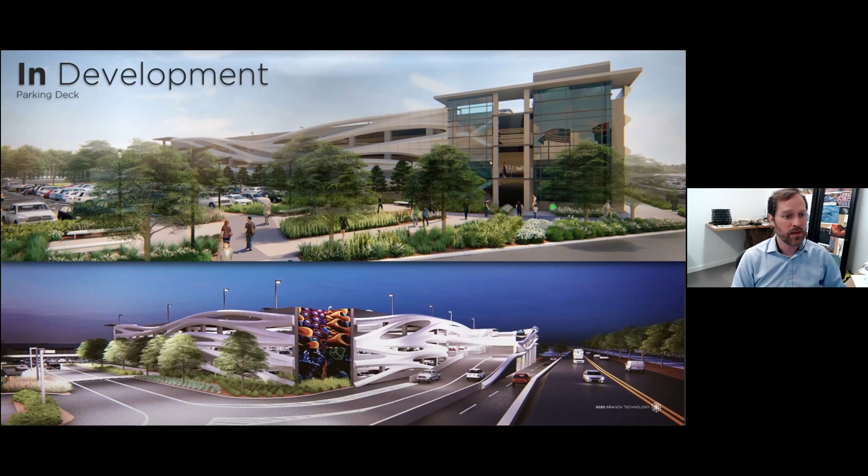And then another example, for a mixed-use urban environment outside of New York. This was for the podium level of a much larger development, with a couple different options. So those are all in that facade, and what we're calling branch clad.

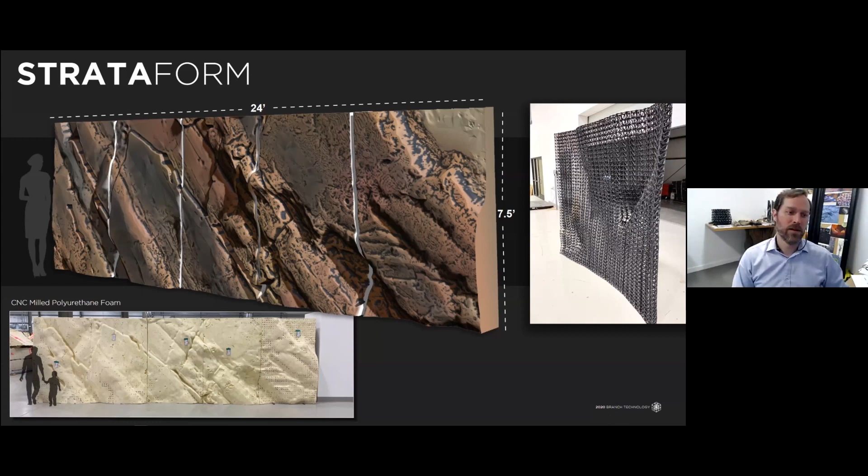And then those pieces come together as components and make larger assemblies.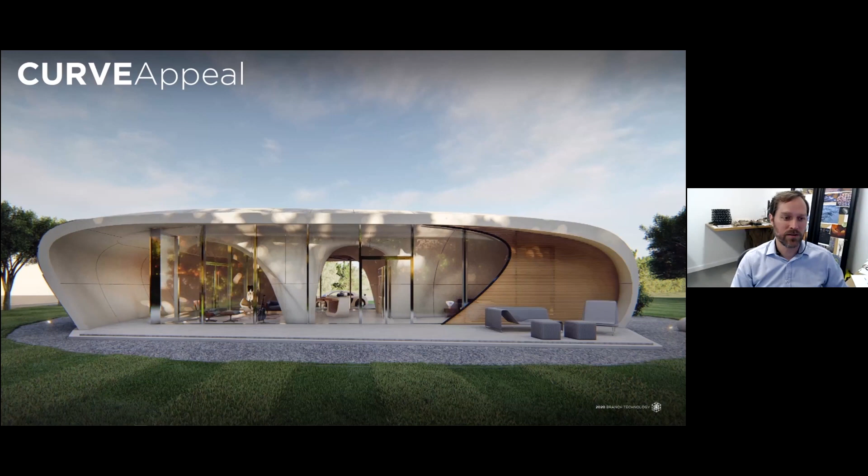And then the demonstration project that is finished on the printing side. This was for a house, a design competition that we sponsored to show what the future of construction can look like. It's really exciting to see what different designers, when they have new tools, can create with them.

This is something that does not come about just by popping out with an idea one day. There's over 100 person years behind this, a very cross-disciplinary team coming from construction, software, robotics, industrial design, and many different industries, making this possible. And then a lot of IP behind this - these are the awarded patents thus far.

One of the things we've had to do is validate all this, because it is new, and get code officials comfortable where we put these different projects. So a lot of testing and certification, because every project we've ever done has had to meet international building code for where it's located.

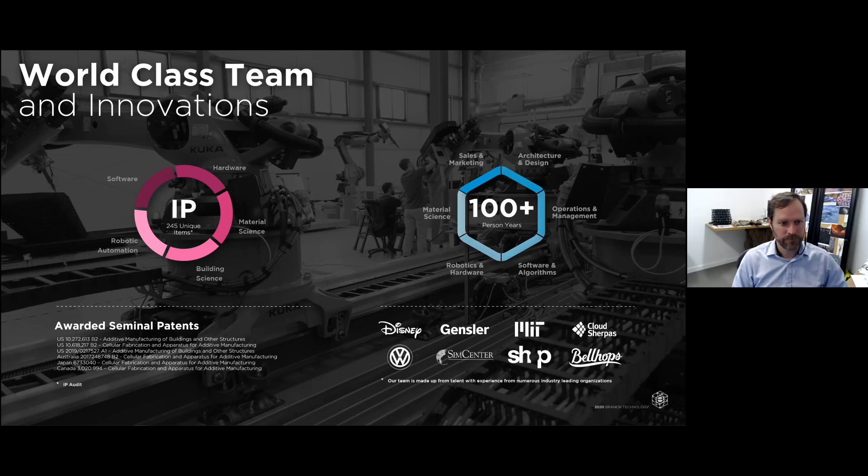These projects are oftentimes the first of their type in the world, and so they garner a lot of press, and we've received the benefit of that. That's been a great thing I'm very thankful for, and working with some amazing partners and clients over the years, and backers that have been part of this.

I started this about 7 years ago, and back then there was very, very little investment money focused on construction tech. You're really the first people to hear this, since it gets announced today: we closed a new round of funding led by a construction tech company called Equipment Share. We're excited for this next chapter that opens up.

You guys are familiar with prefab and all the benefits that brings when you're doing off-site construction - predictable time, predictable budget, factory level quality and efficiency. Well, this brings all of that, plus the inherent customization that 3D printing brings to the table. So instead of looking like a cookie cutter box, every single thing can be custom. It's the marriage of those two capabilities.

The way in which we work is really a turnkey relationship - on the design, the engineering, fabrication, and coordinating with the local install team. So in the end, for general contractors on an RFP, this is something that sets you apart from all the other competitors, meaning you can win greater amounts of work. From an architect and design standpoint, this gives abilities to break out of the box.

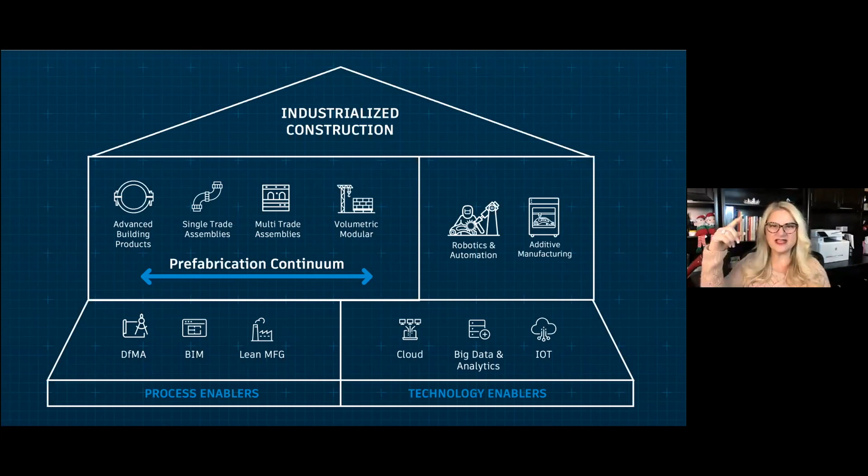Design for manufacturing and assembly does not mean prefab. I feel like in Europe you guys love to say it as if it means prefab. It's actually an enabling methodology that gets you prefab downstream. If you truly understand DFMA, you'll have optimized prefabrication downstream. It's really hard to assemble construction on a stick-built design. That's what you should think about.

You move up to the physicality of the prefabrication continuum. Again, I like to think of prefabrication as the terminology—you have on-site prefabrication and off-site prefabrication. Advanced building products are materials that reduce drying time, curing time, welding time, hot work—anything you can buy from a manufacturer that gets better flow on the job site. They're usually slightly more expensive than their not-so-smart counterparts, but you're not looking at the first cost of the material. You're really thinking about flow for the job site, removing labor from the job site.

And single trade assemblies—that makes sense, right? Could be electrical whips, pipe spools, light gauge frame panels, or even a precast wall. Multi-trade assembly, again self-explanatory—there are both volumetric and non-volumetric multi-trade assemblies, but that's where really all the action is at lately. And then you get to volumetric modular.

They are not in a hierarchy on purpose. Volumetric modular is not the best application, neither is single or multi-trade, right? They are not mutually exclusive—they are a toolkit of parts, and you use the best one for the right application. Sometimes using volumetric mods is like shipping very expensive air, and that's hard.

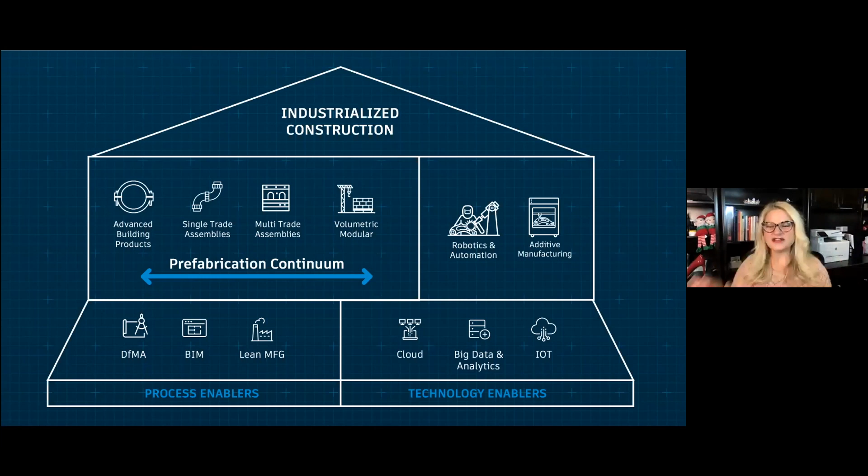I won't go too much into this because Josh obviously did an amazing job. My only thing—and I love that even Josh recognizes this, and somebody else on the panel—is that we're talking about what the next 15 years might look like, and I believe it's been happening already. I know McKinsey does as well. But if you haven't read that book, Who Moved My Cheese, now's the time.

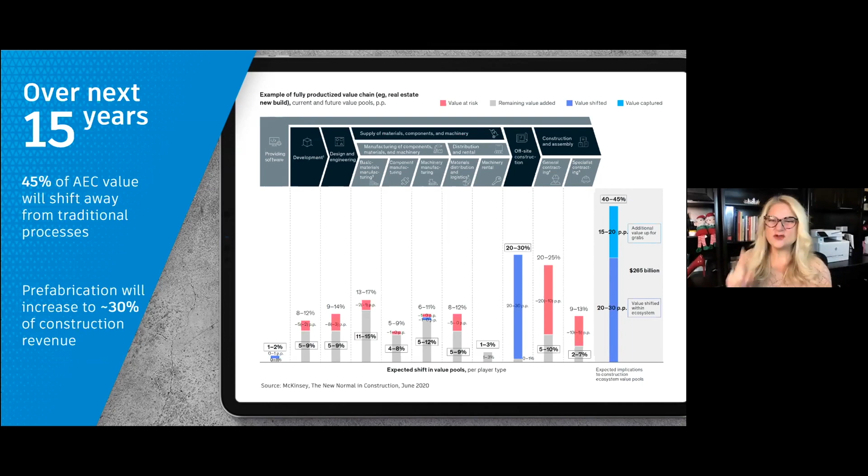There's very little cheese left in our ecosystem. So if you haven't adjusted your internal processes, your learning, your tools, your training, your culture to understand that this is changing—it's not a journey anymore, it's a race. And you may not be in the race right now if you haven't made some adjustments to what you're doing now. So it's like a vice is on our ecosystem.

And I say ecosystem on purpose, because we're not an industry—we are an ecosystem of lots of different industries. You've got those big serial owners people are talking about in the chat, and they're asking for this.

They're kind of tired of having big programs over multiple geographies that have no consistency in cost and schedule, when they know that they need operational consistency. One of my best serial owners actually uses the phrase, I'll take certainty over savings every time.

We have governments that are requiring it and incentivizing it. I've worked with the government of Singapore for many years and lots of other places that are really asking for three things: digitization, prefabrication and industrialized construction, and decarbonization. You'll see that even more as COVID has continued.

But we have a lot of global proof points. You can't go anywhere without seeing a front page story, mostly unfortunately about volumetric modular, because it's kind of sexy, I think. But we've got subcontractors, specifically the MEP subcontractors like Mr. King over there, who've been recognizing the value of prefabrication for many years.

And we've got some, I personally don't put my money on the quirky, even if they have multiple billions of dollars they've raised. I don't put my money on the ones that are telling us we're doing it all wrong and they're the answer. Or one little quirky company that's been doing it, even my old company that did volumetric modules for over 80 years. At the end of the day, this is a very entrenched ecosystem, and it's got lots of different silos that have been interacting with each other for hundreds of years.

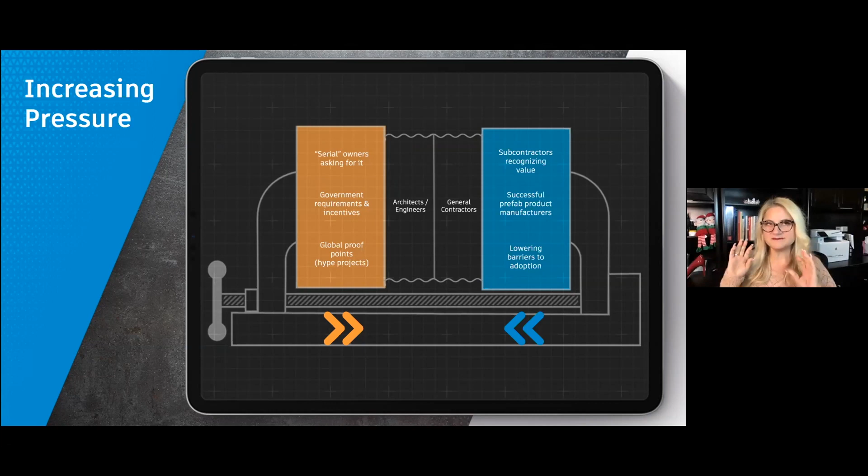But what those companies do for us is they show us a vision of the future. I'm not saying they won't be here in the future, but I think you'll see a lot more of the players that have been in the space actually coming up and either buying some of those companies, adopting their methodologies, or just showcasing some of the stuff they've already been doing, like Patrick did. And we're in a global economy, so there's lower barriers to adoption.

But what's happening to some of our siloed players? The general contractors are getting squeezed. They may or may not know how to integrate some of these pieces and parts. Most of them have actually started buying factories so they could sort of take over the silo next to them.

And then you have architects and engineers. Aside from some of the investments you just heard about, they're also buying fab shops. They want to design and fab because they are also trying to figure out the value proposition of what the new normal looks like. Then you have COVID, and it's squeezing us even harder, right?

You've got to change. There's a lot of pressure. If you don't feel that now, you're probably not going to be here. You're just a little bit numb potentially. So what does that mean for us?

Well, it's one thing to say we've got to change our thinking, we've got to do this stuff. We've got to actually move the information of make, which is manufacture and construct, and operate, which are things like carbon and life cycle of these materials and what we're going to do for them for the environment later. You've got to move all that information digitally up into design.

That's called DFMA. Currently, our only solution is you should bring me up into the front of the process and I'll teach you how to work with my prefabricated element. Well, I'm 49, I'm sort of tired of getting to the front of the process where I have to speak out what I need for DFMA principles. I would rather teach the computer with machine learning and AI to take all the information of these products and pick the right ones together, and also take what I'm doing and optimize that, because it's much smarter than I am.

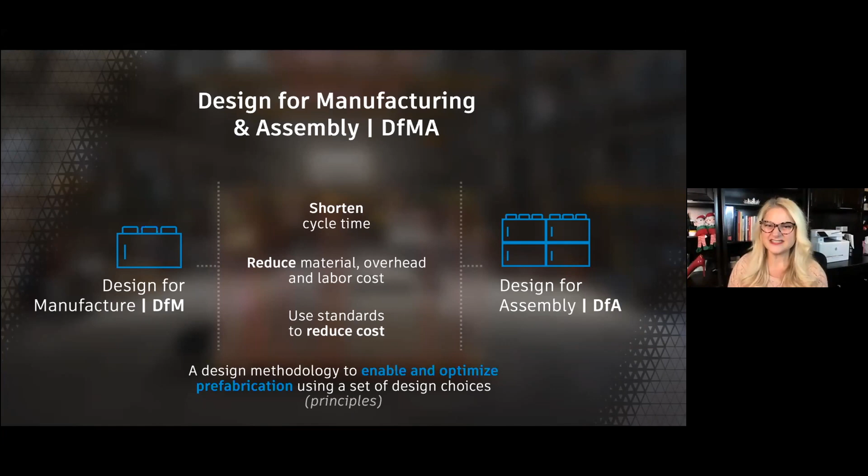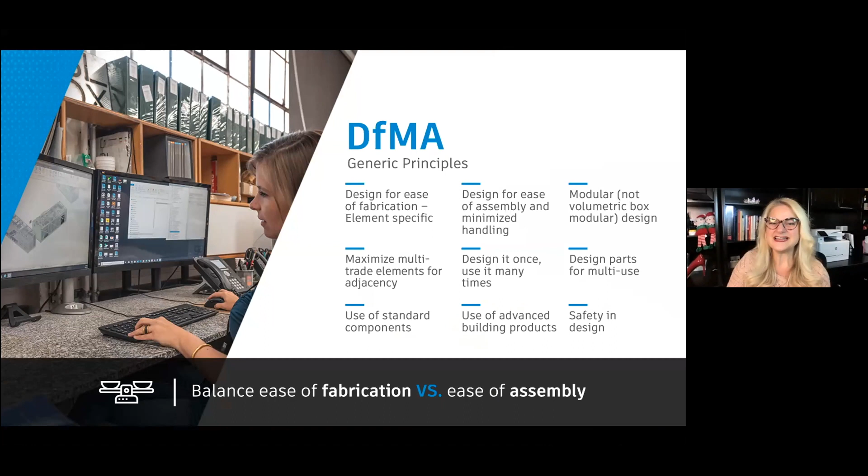These are all enabled and optimized through the design choices, and there are both generic DFMA principles and some that are very element specific. These are the generic ones that I teach. We're not going to go into them today too often, but design it once and use it many times is one of them. Those are easy. Here's where it gets hard.

There are element specific instructions that you need to understand from the person making it. If you multiply just the 55 instructions that go along with this precast wall panel, and then multiply it by the number of other pieces in that building, and then multiply those by the number of proprietary systems that could potentially exist on this planet to use, it would make any architect's head explode. So we can't keep doing this by hand.

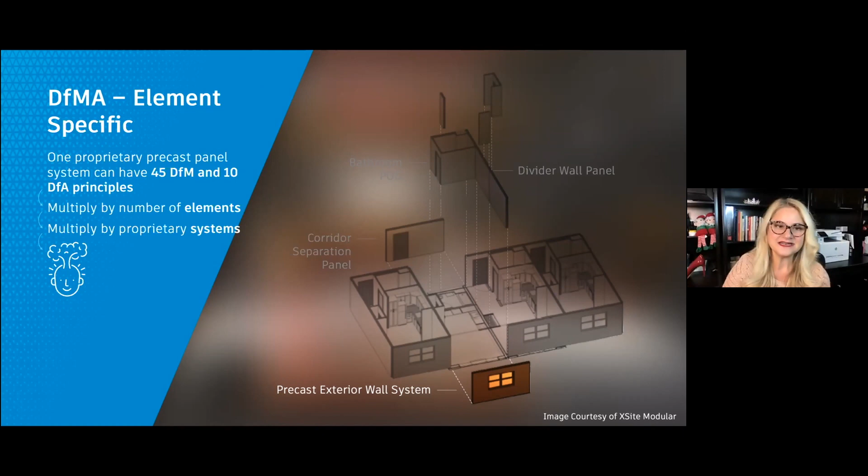I used to own my own company, and I've traveled the world doing this, teaching these processes, but in reality, we've got to move to technology to enable this. Most of my friends didn't understand why I came to Autodesk. When I explained it this way, they were like, wow, that makes perfect sense. The only way I could actually make impact on the space anymore is by coming here to Autodesk, where we can actually create some change.

So prefabrication is more than just these boxes. I want to leave you for sure with that. And by the way, we hear a lot of stuff about housing and hotels, but in reality, where all the money is spent right now, the big money is in all of these places where there's heavy MEP integration. By the way, the mechanical contractors I know are like the most humble, nicest guys in the world.

This has been going on for about 25 years. They've been fabbing. And it's all those places behind the walls, underground, above the ceiling, in the central utility, where it's been going on all along, whether the architect or engineer or even the general contractor recognized it or not. These guys have been fabbing for a few decades because it's the only way that they could survive, by getting more and more productive and safer, by the way.

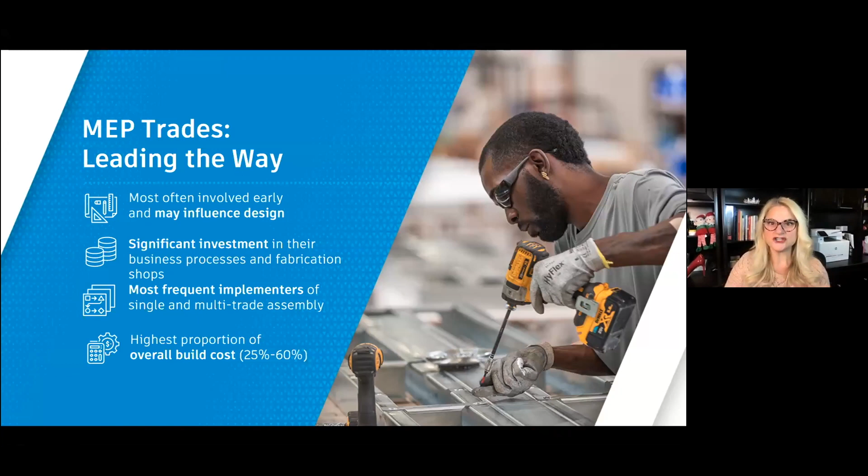So this is where we should really be focusing some of our efforts, because not just in the future, but in the US, there was a study that said two-thirds of general contractors and three-quarters of trade contractors report experience in the past 3 years, now 4 years, with MEP multi-trade assemblies. It's becoming standard practice for intensive projects. That's not 15 years from now, that's now. The MEP trades, I believe, and some of the structure guys are actually leading the charge, for the record. So what's our strategy now that we know that?

So I came here to make a difference at Autodesk, and here's what we're going to do. First, we need to make DFMA and prefabrication easier. We can't keep leaving it in the hands of people like me that are aging out of the space and wanting to retire soon, right? So we've got to embed that and connect the Autodesk platform with this AEC ecosystem. Now, Autodesk platform doesn't just mean our software.

It's a platform that has our product portfolio in it and enables partners and other people's software to interact, so we can get connectivity of the real discrete data that's going to help us be very functional.

We need to create a collaborative AEC community so that my friends don't call me from around the world and ask me questions. When I retire, I want them to go to a place, and so do all my friends in this space. They want this learning to live in a place where you could stand on the shoulders of it and get better and better, capturing it for people around the world. That's important for me here at Autodesk as well.

So let's talk about productization for a minute. By the way, I said snowflakes—what do I mean by that? We will never get transformational in our ecosystem unless we start learning, and you can't learn when you do something for the first time every time. Think about when you've installed equipment on your factory floor: the first day you open it, you're not that productive. There's a learning curve to that.

But most people right now are living in this initial ad hoc or repeatable phase. Even if they're doing prefabrication and DFMA, they're basically waiting to take drawings and then cutting them up in the way that's best to fabricate.

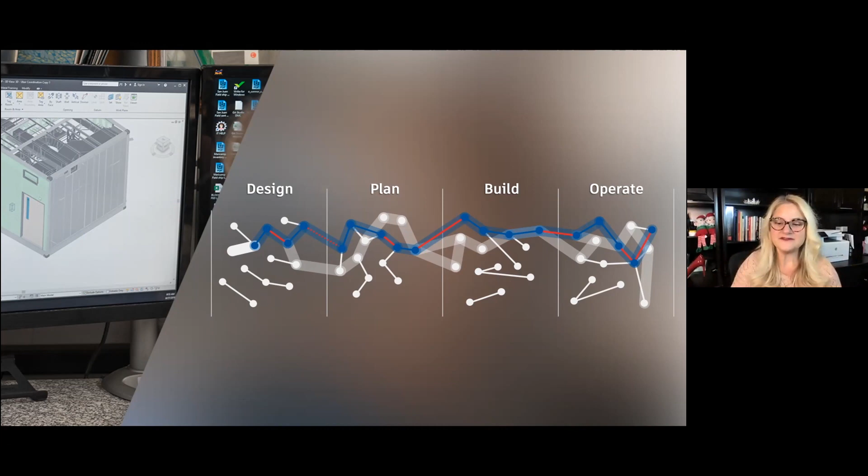And so, by the way, I think the future—I have a minute and 15 seconds left, I've got to tell you about the future in a minute and 10 seconds now. We're very siloed. I just wrote a paper called Creative Destruction, Breaking Down Silos for the New Possible. I don't think it's because we're not smart that we can't get this done—we're paying people in business silos to do work that is effort, not value.

So sometimes people draw things later in the process, they get chucked in the bin and we redraw them, then we have to move them back up and coordinate those drawings. Why do we do that? It's not because we're not smart—it's because somebody lives in a silo and gets paid to do that work, and someone else lives in another silo and gets paid to redo that work. We have to stop that.

Design, construct, and manufacture is not going to look like this—it's going to look more like systems thinking. So you'll see a lot of business model convergence, and everything needs to replicate this systems thinking and convergence.

My ecosystem influencers are super important. Designers, you get to become empowered designers when you use technology to do the things that you don't necessarily want to do. And everyone becomes potentially systems integrators and making products, and we become platform providers.

I always like to talk about my shoe. This shoe is an 8.5. I used to put my foot down on paper and they draw lines around my toes and call it my shoe. It's an 8.5 because I can get it now on an enabled connected platform, and we all know what an 8.5 looks like. And I can set the parameters so that I say I want a red leather shoe with a 4-inch heel from a 5-star manufacturer. And by the way, the software also says you should buy this shoe, this shirt, and this necklace, and this jacket. That's what we need.